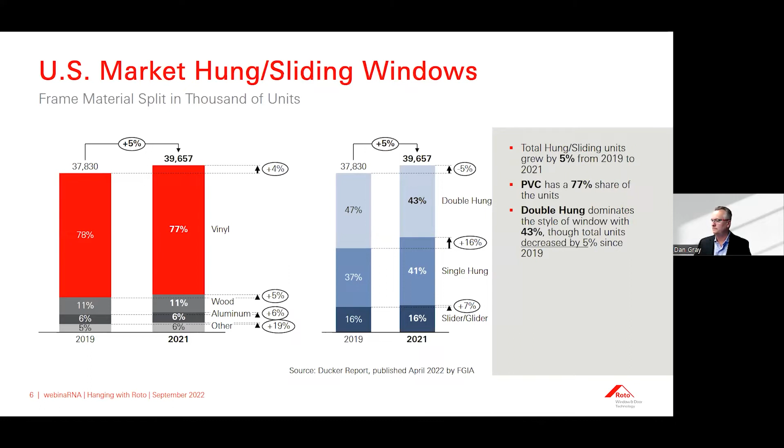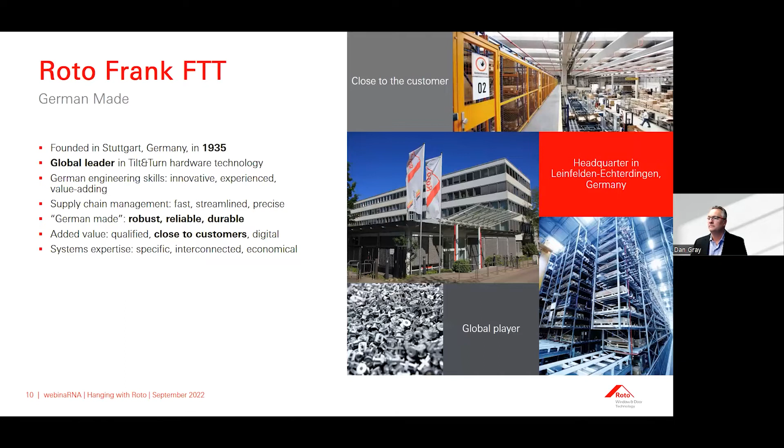From here, we turn to Roto North America, which was established in 1979 in Chester, Connecticut. Today, we have two manufacturing plants, one in Chester, where we are located, all of us on the call today, except Chad, who is up in Mississauga, Ontario.

Roto Frank acquired Frech Die-Cast Metals in 2012, and since that time—actually celebrating our 10-year anniversary as partners within the company this year—we have integrated the product line holistically throughout North America for our customers.

Today we have four main product groups: sliding patio door, casement and awning, hung and sliding, and tilt and turn hardware, which will be the focus of our fourth and final webinar, likely to occur toward the end of November, early December this year. What we do is strive to provide excellence in window and door hardware to the marketplace.

Our mission is to create superior customer value, and we do that by identifying five main purchasing criteria from our customer's perspective: quality of hardware, performance of the hardware, lead time, response time, and availability of product so that customers have what they need when they need it.

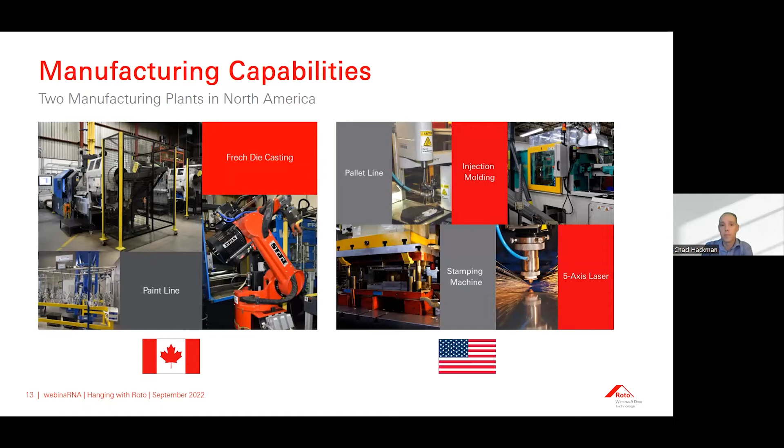Roto North America's portfolio of manufactured and sourced hung window hardware includes sash locks, sweep locks, pivot bars, and other premium products, which Chris Griffin and I will speak about in the following slides.

Sash locks: Roto's 2 main zinc die cast sash lock styles are available. The first is our 8500 series with traditional rounded corners. Due to the nature of the shape, each backset will have a slightly different screw spacing.

As these are produced at our facility in Mississauga, several powder coated options are available in lot sizes of 1,000 sets for standard finishes. Other finishes may also be available with increased minimums. The sash lock is available in both non-guided and guided versions, depending on your requirements.

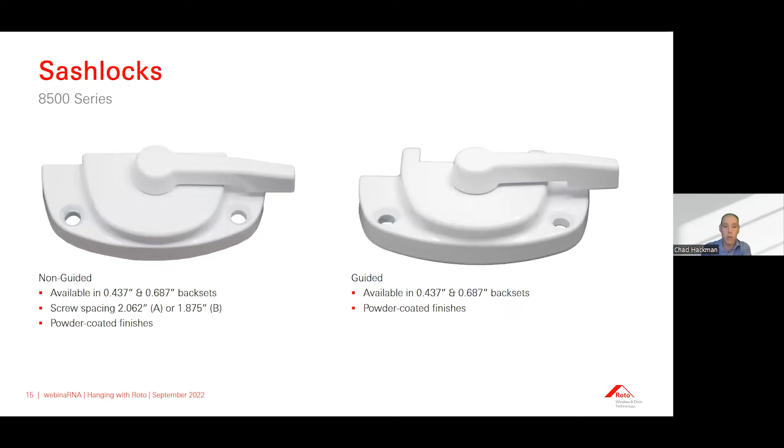Our most common 8500 series top mount keepers are shown on the next 2 slides, along with some optional face mount versions. Keepers are available in a variety of dimensions, and our applications engineer will work with your drawings to ensure the best fit possible with our hardware.

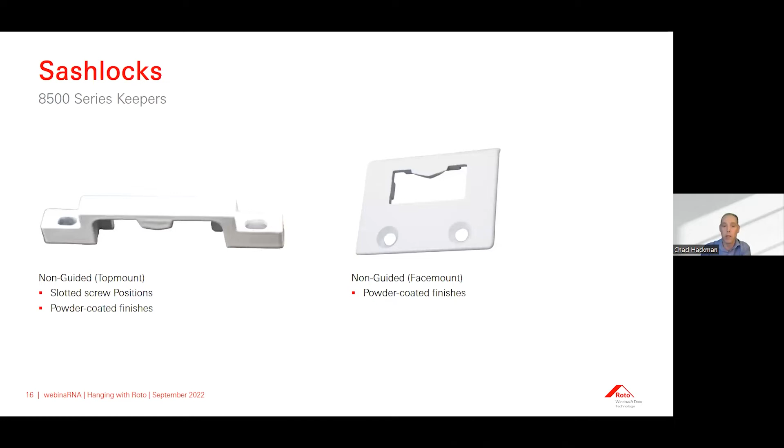Shown above are 2 of our non-guided options. Guided keepers can keep a window more secure, as our sash locks have extended flanges which wrap around the edges of the corresponding keepers.

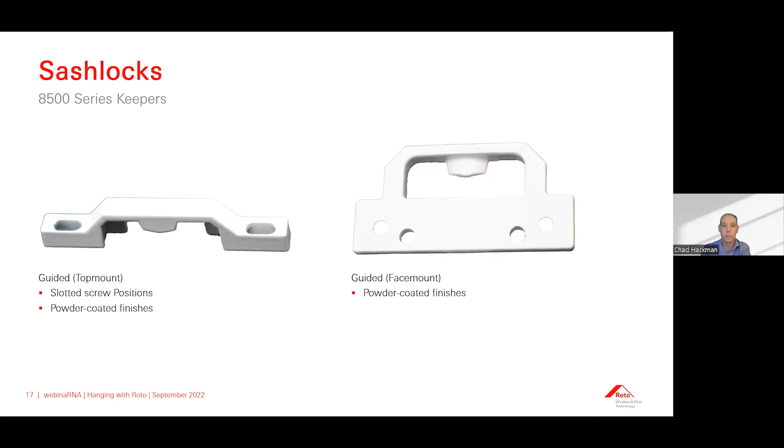Roto's other main sash lock line is the 8700 series with its more contemporary straight edges. The shape allows both available backsets to maintain the industry common screw spacing. The guided version also has a lockable option for further security.

Spring-mounted release is circled in the images shown here. As with the 8500 series, standard powder-coated finishes are available in lot sizes of 1,000 sets, made in-house.

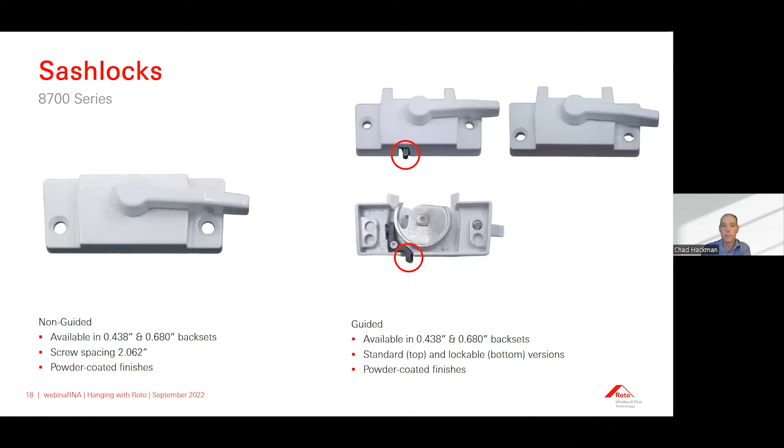Our most common 8700 series top mount keepers are shown in these images. Again, our applications engineer will be happy to work with your drawings, ensuring the best possible fit with our hardware.

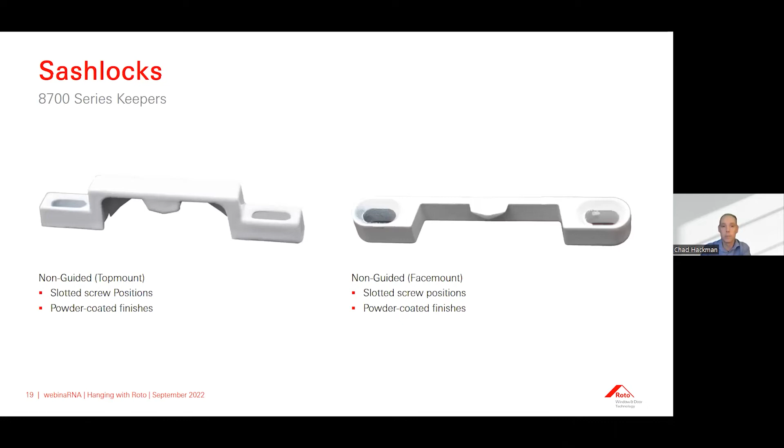As with the 8500 series, guided keepers are offered here as well and can keep a window more secure. Since our lockable version has a spring mechanism completely within the housing of the sash lock, the same guided keeper can be used for both standard and lockable 8700 series sash locks.

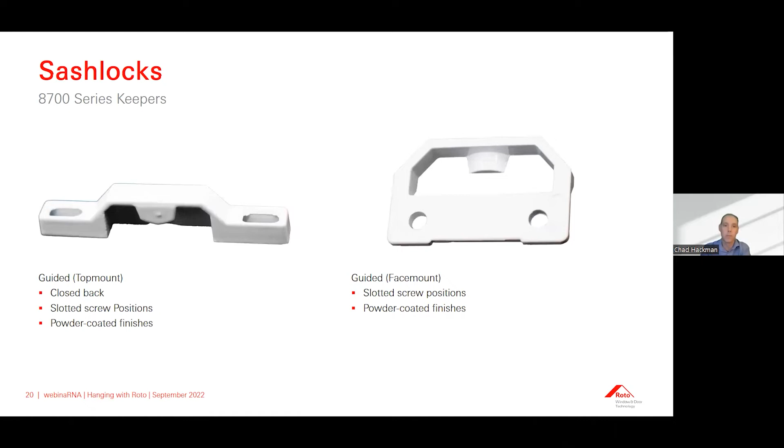To complement our main sash lock lines, Roto also offers a variety of sourced options to expand our application possibilities. The first is a low profile version with housing height under 1/2 inch. These products are stocked according to forecast in select powder-coated finishes.

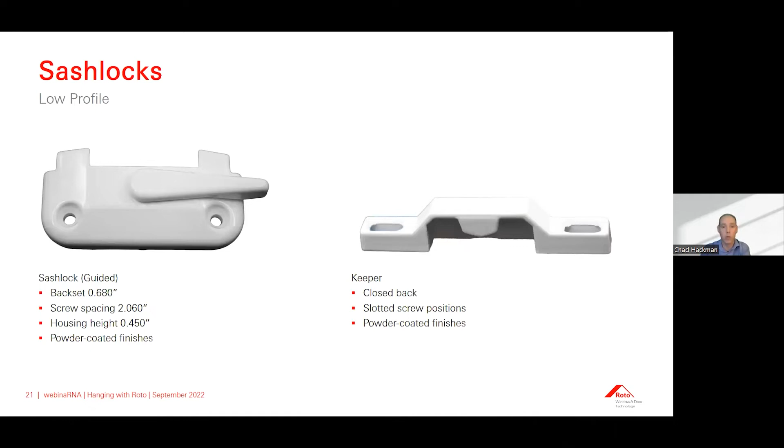The second is a recessed flush mount version for a more concealed look. Select powder-coated finishes are also stocked according to forecast.

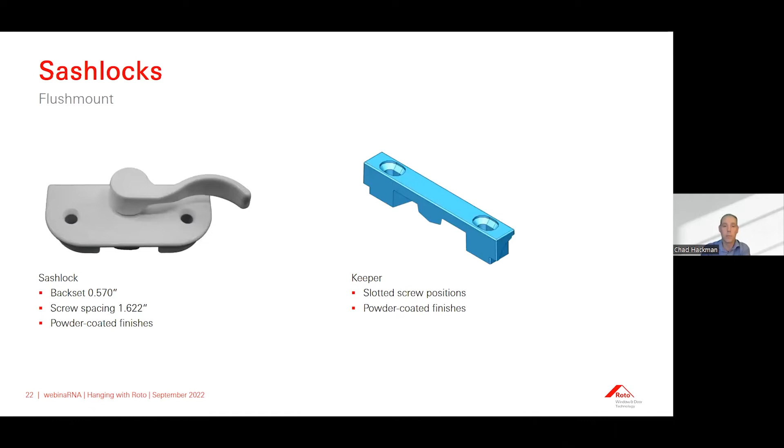Complementing our cam sash locks and sweep locks, die-cast pivot bars are available in a couple of styles which may meet your hung window requirements. The pivot bar shown here is our non-handed option. These are made in-house.

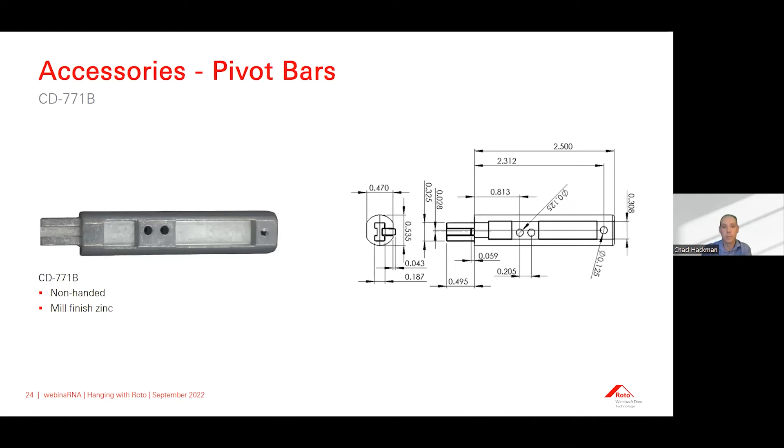Our second option has an extended flange which wraps around the window corner. This design is handed, so left hand and right hand pivot bars should be ordered in matching quantities, made to order in Mississauga. Pivot bars lend themselves well to custom zinc die casts. If neither of these versions work for your system, we can discuss contract manufacturing options.

I will now let Chris Griffin, our Research and Development Manager, talk to you about additional premium and new window hardware products offered by Roto North America. Chris?

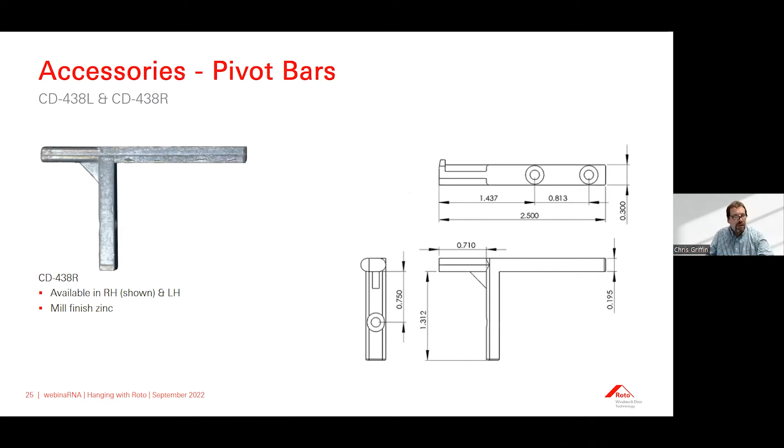Thank you, Chad. As Chad stated, my name is Christopher Griffin. I am the R&D manager here, located in Chester, Connecticut. And I'm happy to introduce the new DuoTilt Sash Lock.

This is a combination sash lock system that allows you to not only open and close the window as you typically would, but to also tilt it in for cleaning with the same hardware. It will initially launch with 8 finishes, architectural and powder coat finishes available. The patent pending design is initially designed around PVC profiles.

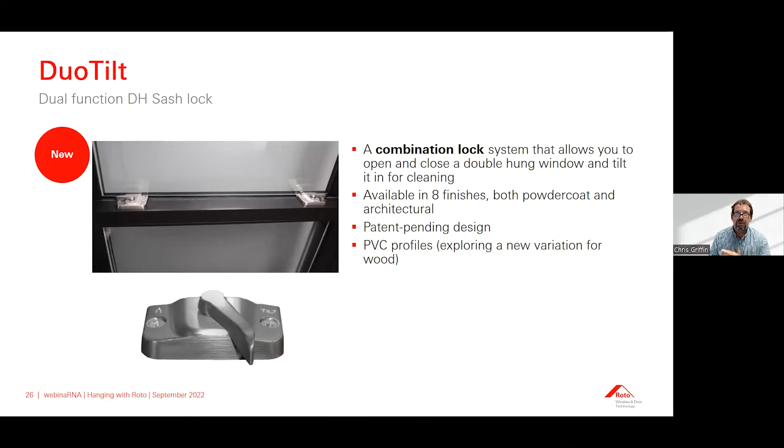The lock, unlock, and tilt positions are clearly defined with a tactile feel and visual indicators on the cover of the DuoTilt.

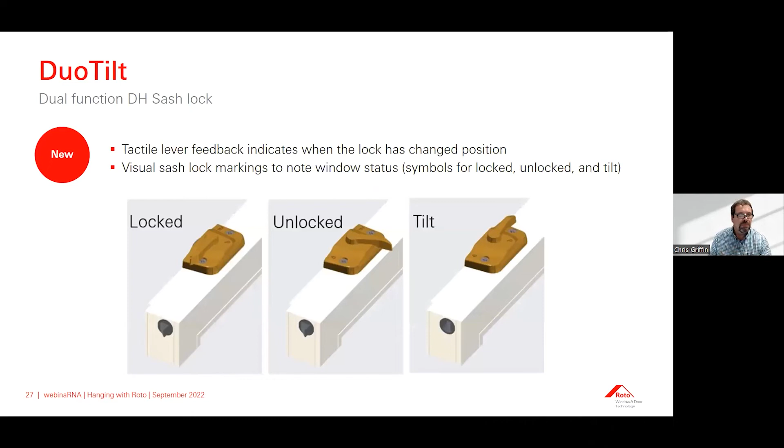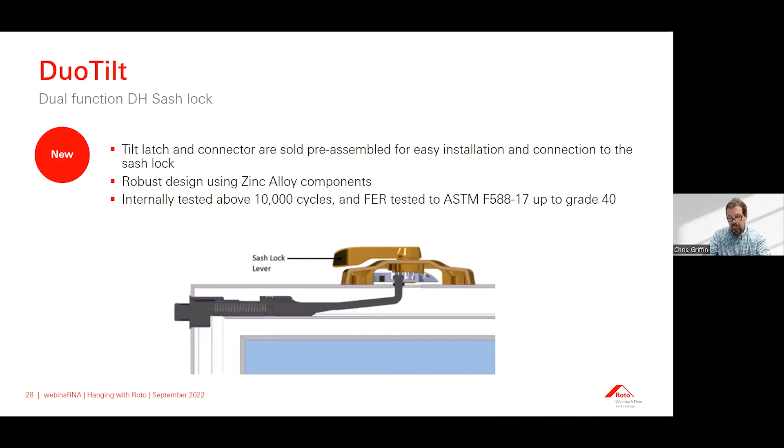The next slide is a video of the Duo Tilt. As you can see, it opens and closes as a double hung typically would, but then the sash locks are used to tilt the window in for cleaning.

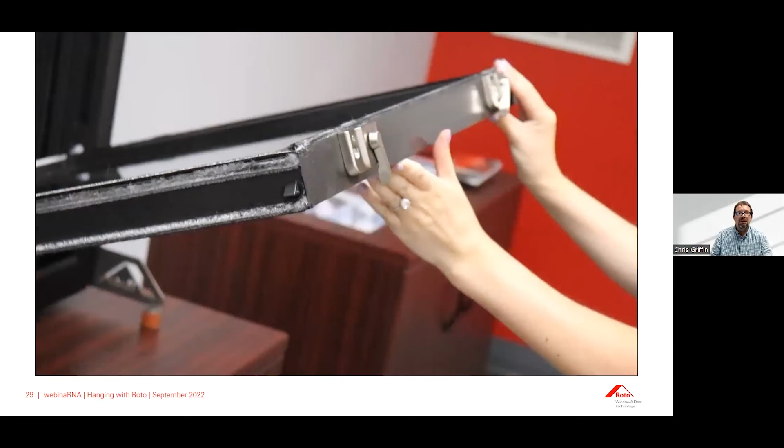This is accomplished by attaching the tilt latches to the sash lever of the sash lock. And when you're done cleaning the window, you just push the window in and close it as you normally would.

One of our premium products here at Roto is the Heritage Sash Lock. It is a premium product with an old world look designed specifically for wood windows and wood-clad windows. Heritage Sash Locks are available in 6 premium finishes and come with color match screws.

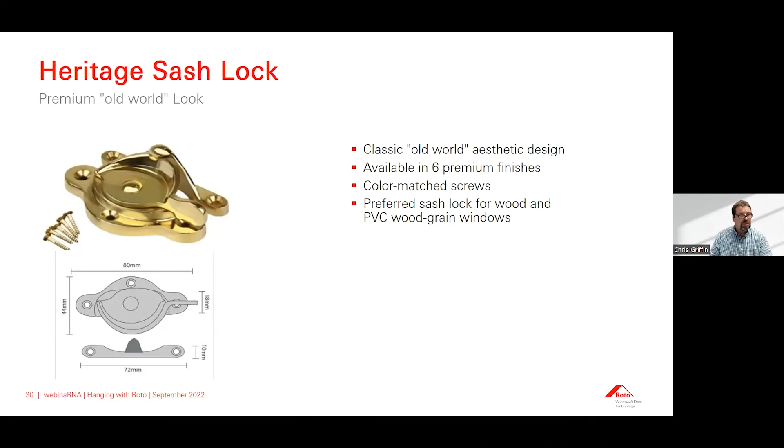You can see we have several hole locations for different back sets and a location jig to make sure there's proper alignment between the striker and the sash lock, without using jigs or tape measures or anything. You just drop that location jig right in there and it's automatically set. You screw both parts down and you're done.

This is completely manufactured here in Chester, Connecticut. We use our plastic injection molding machines to make the parts and our in-house assembly team to put them together. The patented design is very robust and has passed 8,000 cycles in a custom in-house life cycle test, and has met or exceeded standardized FER and hurricane impact system testing.

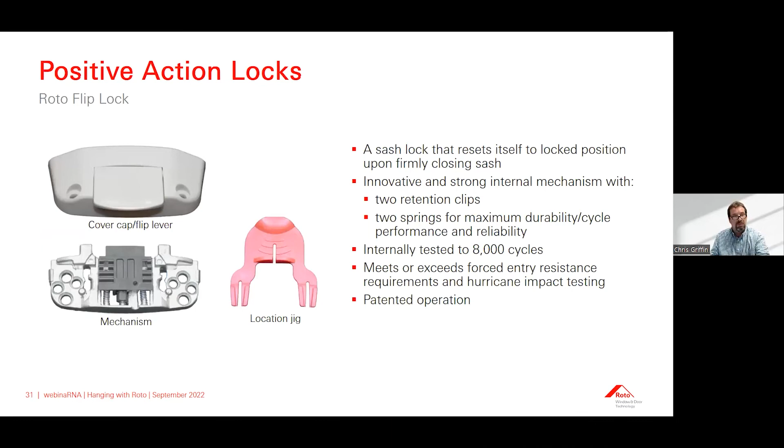The window is unlatched by pulling the knob on the string, and then, just like the standard flip lock, closes automatically and latches automatically snugly when you close the window. The ease of the design is based around people with limited access.

I'd like to talk a little bit about our manufacturing, our contract manufacturing program here at Roto Frank of America. Across the globe, Roto is known for its superior manufacture of our own innovative designs. However, Roto Frank of America also has a contract manufacturing program that allows us to use our global infrastructure to manufacture products that you have designed yourself or products designed specifically for your company.

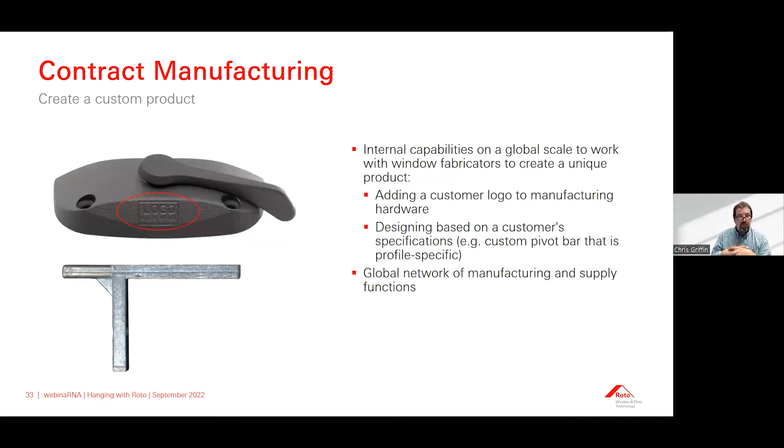We would work together on the designs with our team here in Chester, and we would manage our global network of manufacturing supply chains to bring any product that you can think of to fruition.

We're also going to, in the next section, talk about window opening control devices, WOCDs.

To fill the need for this product, Roto Frank of America has formed a partnership with Mighton Products. Mighton manufactures a wide range of WOCDs called the Angel Vent Lock. Roto is the exclusive distributor of the Angel Vent Lock throughout North America, and we're going to take a look at some of the offerings over the next few slides.

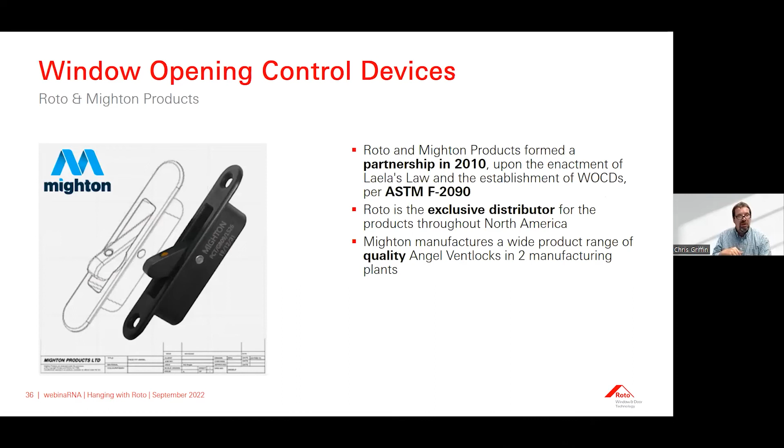The first one we're going to talk about is the Face Fix Single Action AVL. Designed primarily for wood, double hung, and single hung windows, manufactured out of Zamak 3 and available in several colors. It is a simple single action device. Since it's a single action device, 2 devices are needed for each window. As with all of Mighton's AVLs, the Face Fix complies with ASTM F2090 and comes with all of the legally required documentation and installation instructions.